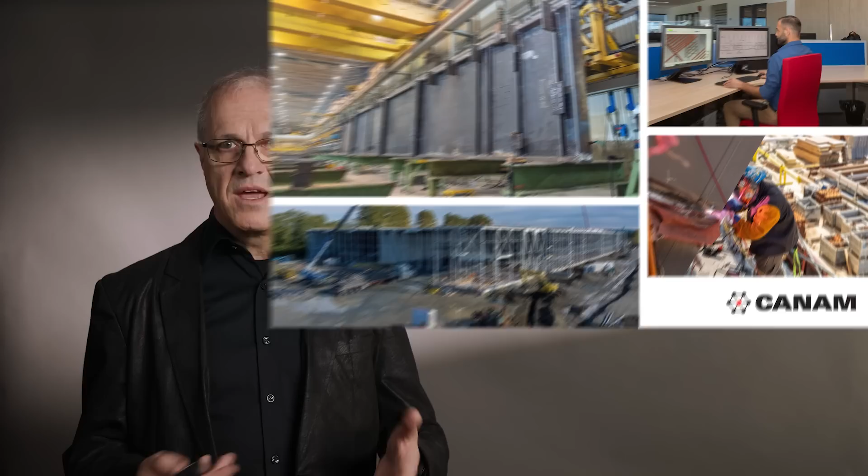Good morning, everyone. My name is Tony Poulin from Canam. Today, we'll have an overview of Canam, one of the largest structural steel joist and deck fabricators in North America, and a short case study of 3 typical high-rise projects we built in Canada and USA, and about the challenges we faced at drafting engineering.

I have been working at Canam for more than 30 years at different positions. I am the drafting manager of a team of more than 400 draftsmen located in different countries. We have 10 plants located in Canada and one of our bridge plants in Northeast USA. Our main plant is located in Saint-Gédéon, a small town about 130 kilometers south of Quebec City and 50 kilometers from the US border.

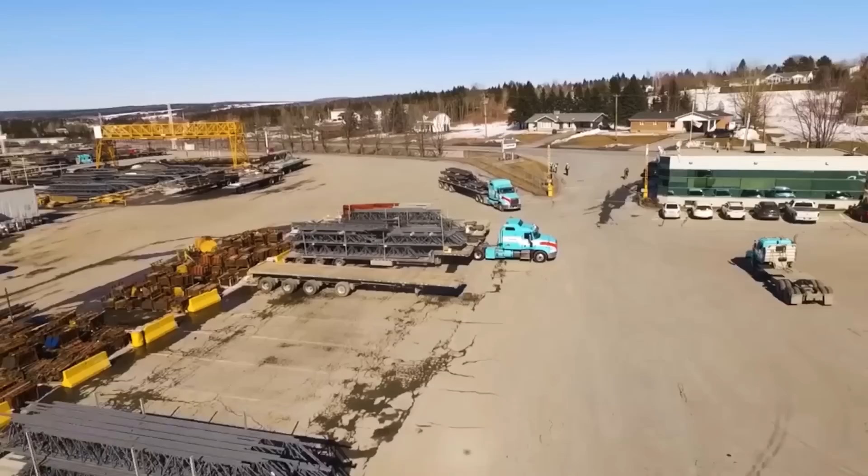The plant is 700,000 square feet and has 14 shops that fabricate our different products. We have a production capacity of 380,000 tons a year. We build in Canada and United States around 8,000 projects a year, from supply only, installed by others, to complete design and build packages, including conceptual design and installation.

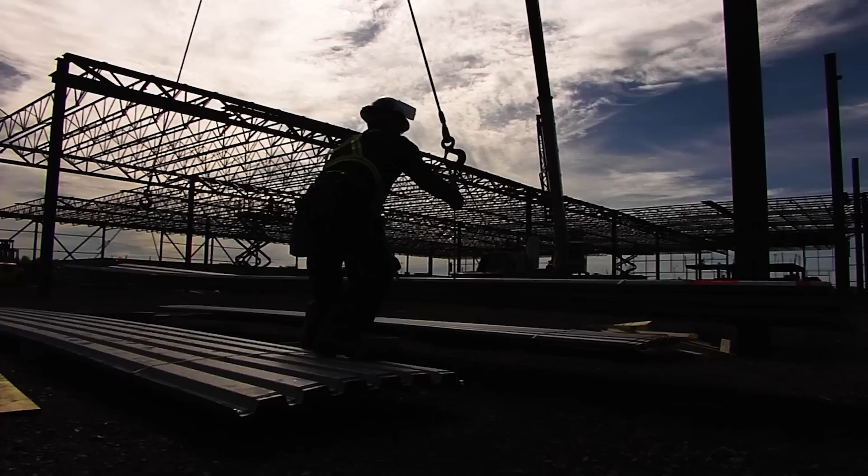Canam was founded in 1961 as a joist and deck supplier. Now Canam offers a large range of different steel construction products. Our latest are prefabricated load-bearing light gauge stud walls and shear walls that speed up the erection of multi-residential buildings. Canam has its own trucks and trailer fleet that deliver all across North America.

We also have 3 offices overseas, one in Kolkata, India, with 125 employees, where a 4th level is in construction in our building to add 75 more employees in the near future. We have an office in Manila in the Philippines with 60 SDS2 drafters. And we have an office in Brașov, Romania.

Our main overseas office is in Brașov, Romania, with 435 employees. Located in the Transylvania region, it celebrated its 25th year in May 2023. In 1998, Canam was in need of steel detailers because they had several major projects on their radar for the years to come. Several projects required hundreds of draftsmen. We had projects requiring more than 70,000 hours of detailing each.

The Romania operation started with 15 people who were trained in steel detailing, and the office grew in number quickly. Today, the engineers and drafters at this office work on the drawings of all the products Canam provides. In 2002, Canam relocated from a rented downtown office to the south of the town in a new office they built and own. It's a 4-story building and all of our 435 employees work there.

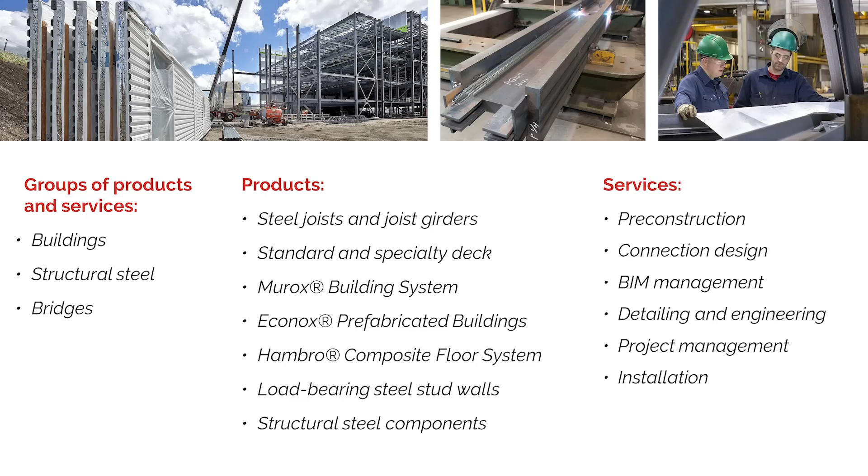We offer several steel products, all related to the construction industry, and some have been developed by Canam and are registered marks. We provide all kinds of steel buildings from small ones to large sports stadiums. We build bridges too. One is in progress that will replace the bridge between Windsor, Ontario and Detroit, the busiest bridge between Canada and the United States. Our Murox system is a complete prefabricated wall that includes all the material from interior to exterior finish, including windows and doors.

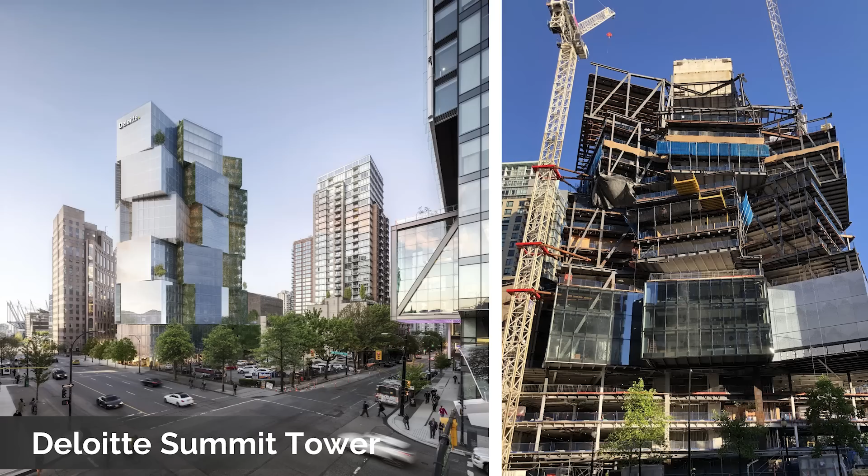Our first case study is a complex high-rise we built in downtown Vancouver, the Deloitte Summit Tower. This building was made of several cubes oriented in different directions. The detailing of this project was done using SDS2 with our drafters in Manila, Philippines at 85%. The remaining 15% of the detailing was handled in Quebec City. Almost all the steel was fabricated in Quebec and shipped to Vancouver. There were 5,680 imperial tons of steel for 24 stories.

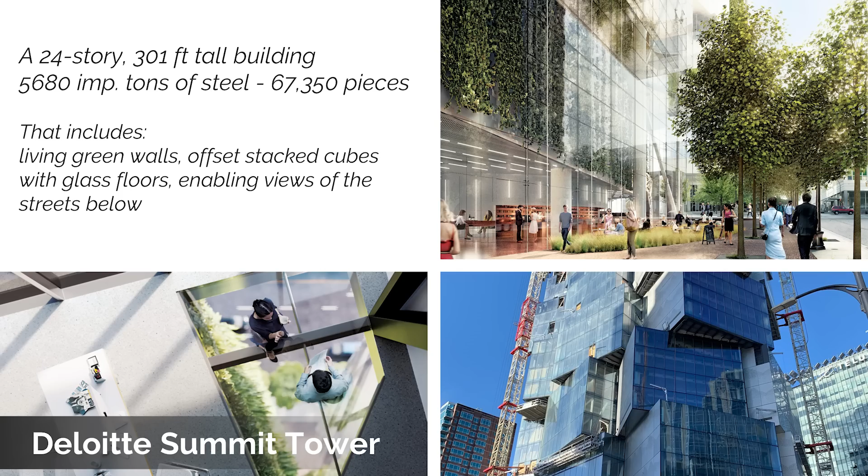The cubes that ran 4 levels high each were aligned in different directions and independent from each other. Some of the outrigger parts of the bottom of the cubes were made of a glass floor. The roof of one cube was the floor of the upper one. 2 tower cranes were required for the erection of this building.

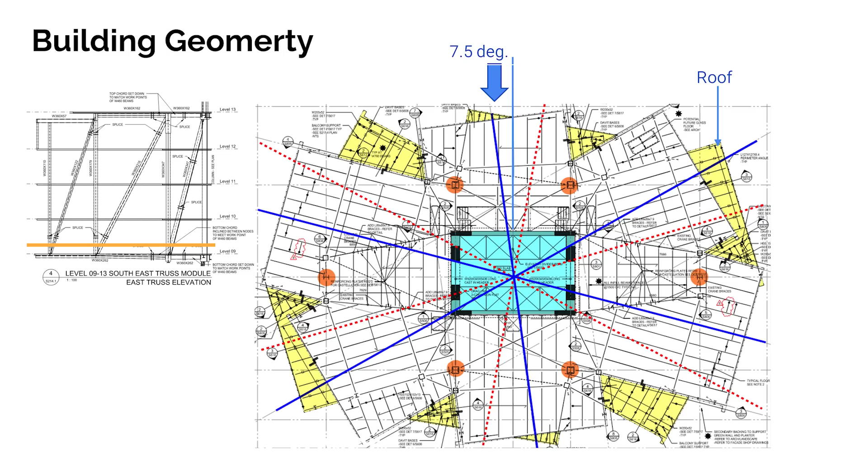The geometry was complex. There are just 6 steel columns that run from the ground to the roof, in orange on the sketch. These columns were W360 by 1,299 kilograms per meter, the heaviest W360 shape available in Canada. The concrete core stabilizes the building, while the 6 mega columns support the building. The color yellow represents the transition area, the roof of the lower cube.

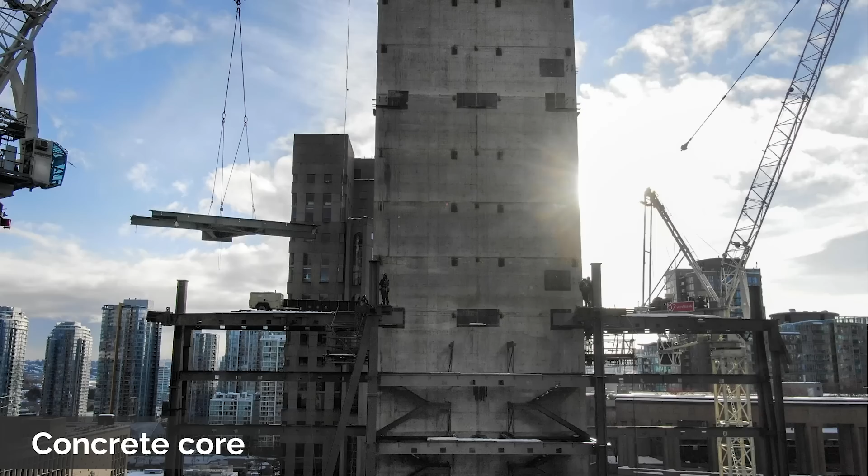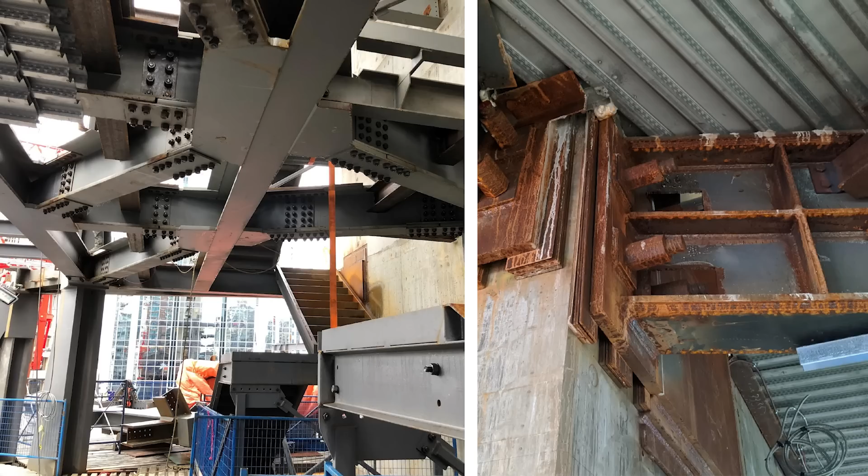The stairs fit tight between the cube's support and the concrete core. All the stairs were modeled and included in the SDS2 model. The beams were attached with Dywidag anchors that go from one side of the concrete to the other side of the concrete for support. The detailing of the 4-level trusses was difficult because there was a huge camber to take into account.

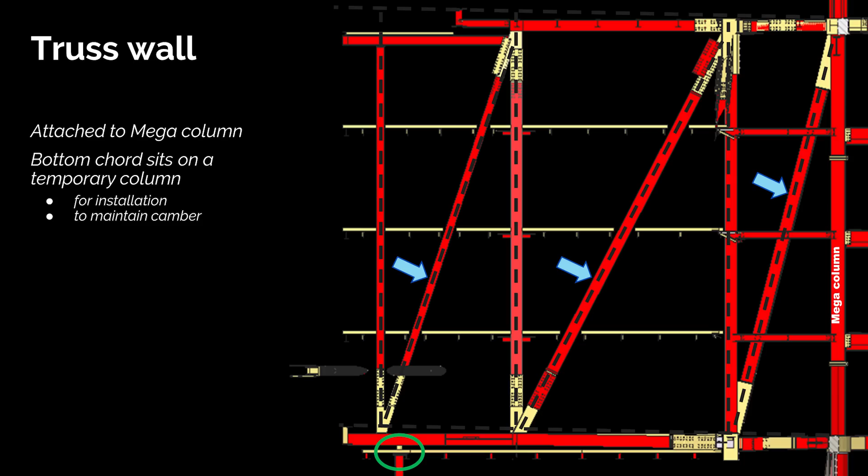We detailed the trusses flat in SDS2, and with the help of construction lines, the diagonals were detailed shorter so they fit the camber before it's going down after the dead loads were applied. We used hydraulic jacks to support the cube temporarily. The jacks were progressively removed as the erection went on.

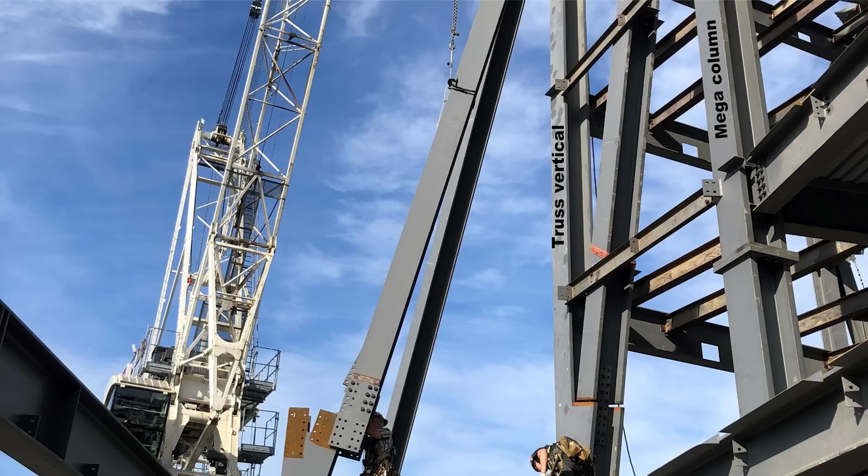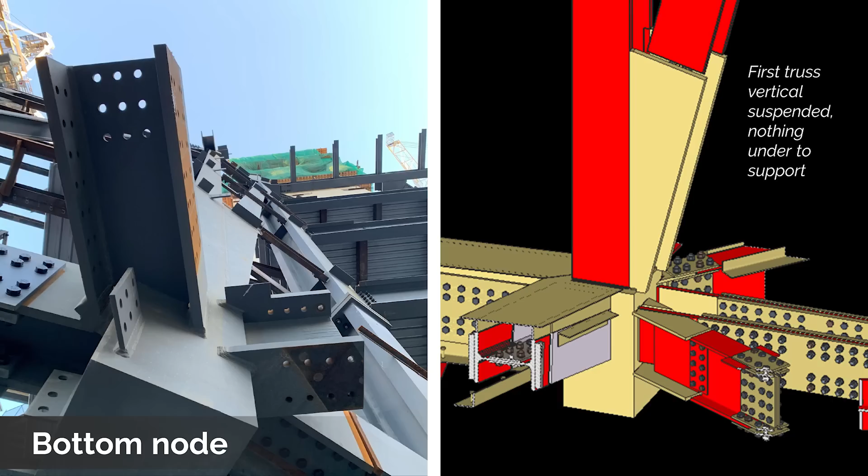Here is a truss diagonal that is being erected close to a mega column. Of course, because of the depth of the trusses, 4 levels, all their components were field bolted. The nodes at the bottom of the trusses were complex to detail and to fabricate. And there was no support under the truss first vertical since the cubes were cantilevered. The top nodes were a bit less complex to detail.

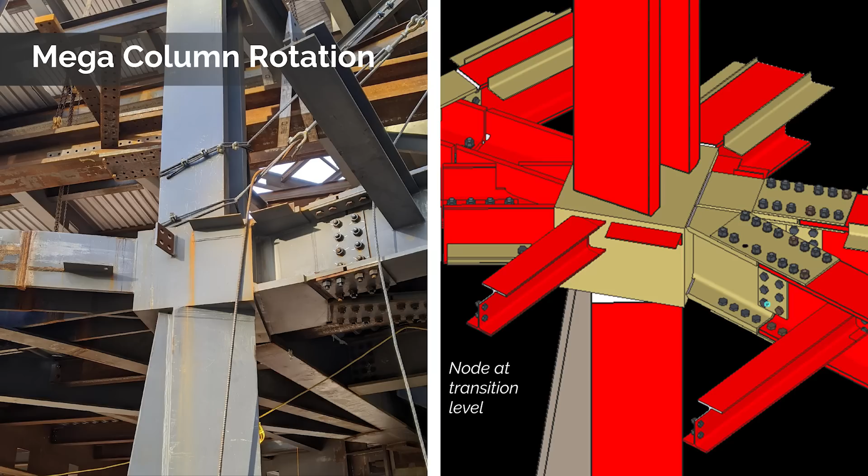The mega columns had to rotate to suit the lines of the cube. The shop drawings of the nodes required a lot of views to make sure they were fabricated correctly. We worked with contact points instead of axis and center lines, and it ended up to be a good decision. It was easier in the shop and the nodes fit well on site. We also needed to indicate the order and procedure of assembly to make sure nothing was in the way at the moment of welding each plate of the nodes.

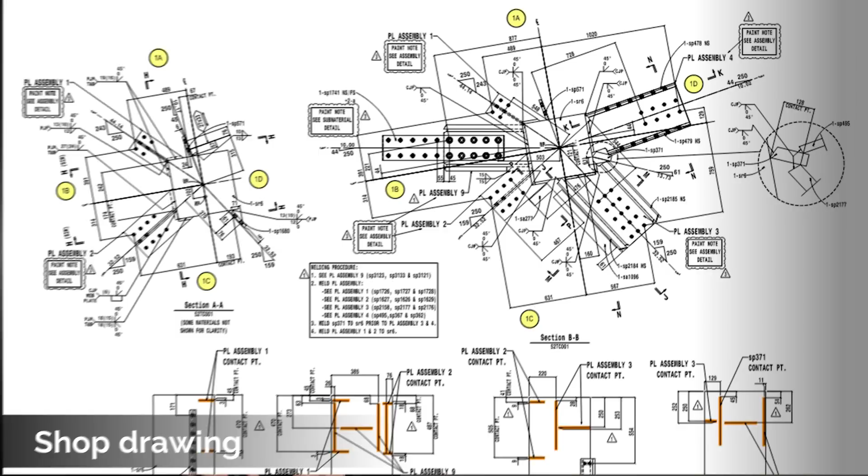Teamwork was required to make a project as complex as this one. The engineer, detailer, project manager, and shop manager met every day and with the help of the 3D model, made this project a success. We have another project based in downtown Toronto and it's in progress.

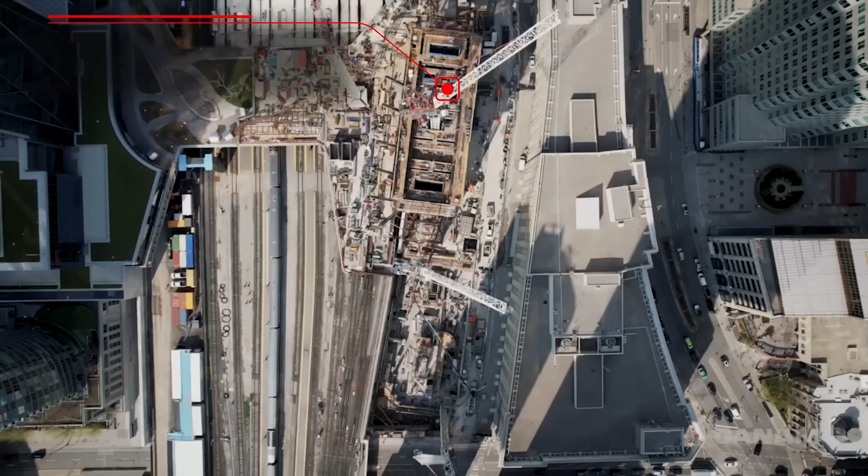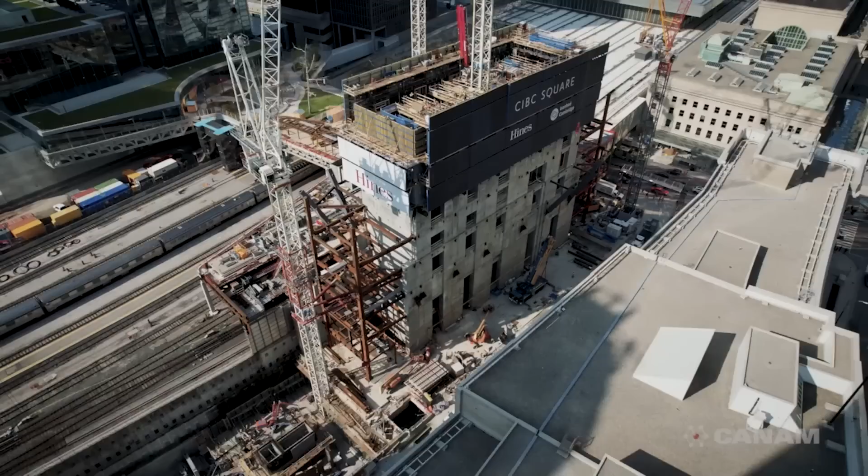It's 141 Bay Street, CIBC Square 2. This is a 56-story building in the heart of the city. The main challenge of this project was the fact that it's built above the Toronto train tracks and the city doesn't want to stop the train operations. It's quite a challenge for erection, and the base of the building needs to be smaller than the main building to clear the train tracks.

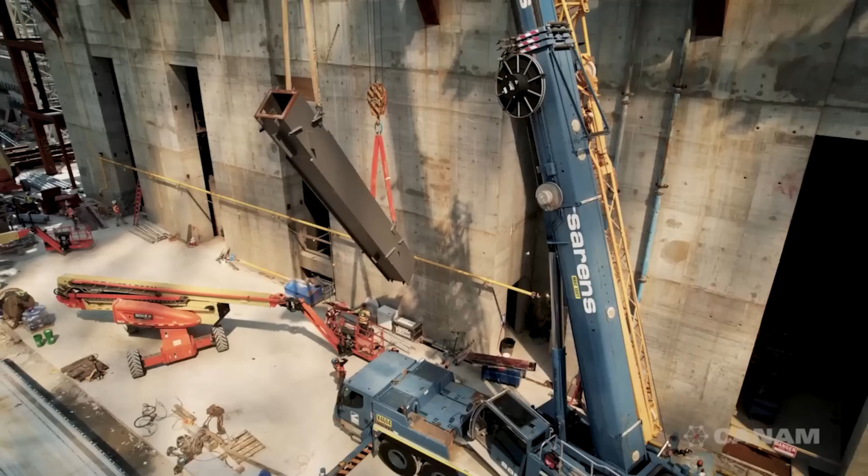So the lower columns are skewed to start with a small base and allow for a larger footprint above the train track. This project is detailed with SDS2 in our overseas offices and in Quebec. The model is so huge that we separated it in 4 parts to ease the navigation and the transfer between offices.

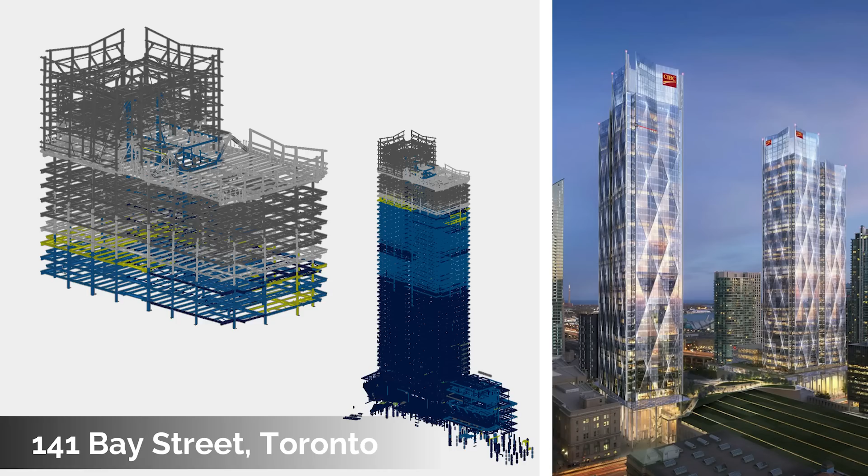For the last 2 years, though, we have used virtual desktops so all of our offices have access to the model in real time. No need to copy the model from one server to another. Manila is the last of our offices where VDI will be installed. So for all the next major projects, we'll work in real time in all of our SDS2 models.

The lower floor above the train station needed to be erected just between 1 a.m. to 4 a.m. while the train was not in operation. After the 4th floor, the city allows for erection during the day. They consider that 4 levels of floors would shield the track. The unloading area is small, which requires a lot of transportation logistics for a project of this magnitude.

One of the last projects I'll talk about, we had a challenge with the 3D modelization. This building is 18-story high and it's located in the city of Portland, Maine. At 18 stories, this building is the tallest in the state of Maine. The important fact here is the difference of columns' wide flange shape that support the same beams. This is where the challenge came from.

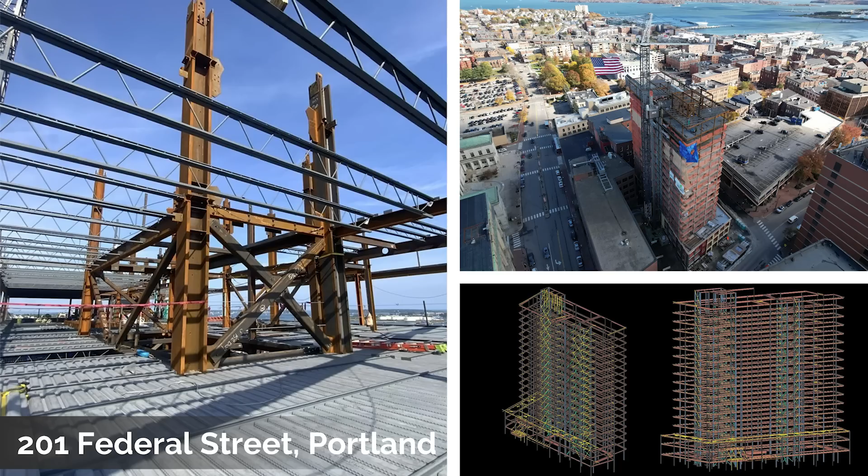The heaviest columns were W14 by 665 pounds per foot, surrounded by light W10 and W12 columns. There was no concrete core in the center of this building. The core was made of massive steel shapes. Because high-rise steel buildings are very heavy, the lower steel shrinks and shortens due to the dead weight coming from all the steel above. We are used to dealing with these kinds of particularities with high-rise buildings.

But in this case, the columns of the core were so massive that they did not shorten, while the smaller adjacent columns did. So how can we handle that with a 3D model? If we detail the steel flat, the column that shortened would be fabricated too short. If we detail it with different ratios of shortening, we'll end up with sloped beams that are not sloped in reality. So we had to graphically modify the columns after our 3D checking process.

By doing that, we kept the data of the 3D SDS2 model intact for the transfer to our automated equipment and robots, and fabricated the pieces long enough to suit the shortening. This is the tip we found to make everything work. Today, the 3D modelization does not automatically allow us to handle these challenges, the steel shortening and the camber. We need a ghost model for reference or to work with construction lines to make it work.

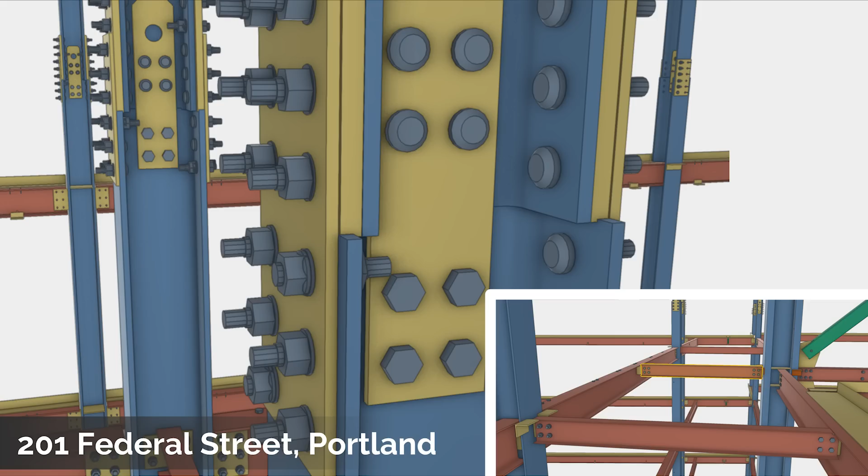The model is the source of truth, either before the steel falls into place or after, but in between, we need to use tips and tricks to manage a fabrication that will suit different movements while erecting the steel. So I hope you found this presentation informative.